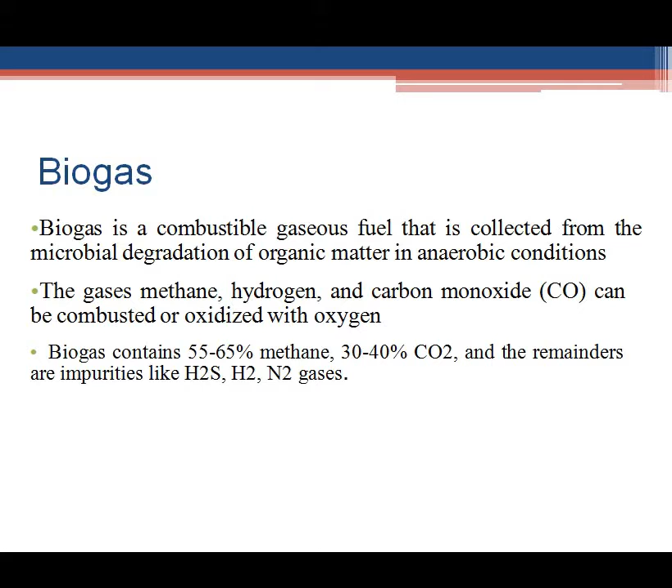So biogas mainly comprises 55 to 65% methane and 30 to 40% carbon dioxide, and the remaining impurities like H2S, that is hydrogen sulfide, hydrogen and nitrogen gases. Now moving on further, biogas is produced by digestion, pyrolysis or hydrogasification. Digestion is a biological process.

See, anaerobic digestion is nothing but any process which is taking place in the absence of oxygen. Aerobic is in the presence of oxygen. Anaerobic is in the absence of oxygen. So whenever a process takes place in the absence of oxygen, that is known as anaerobic respiration or anaerobic digestion.

So in the absence of oxygen and the presence of anaerobic microorganisms, this anaerobic digestion takes place in a container called a digester. In this digester, the organic matter undergoes fermentation and anaerobic bacteria extract oxygen by decomposing the biomass at low temperatures, in a temperature range of 35 to 70 degrees Celsius, and in the presence of moisture, this process takes place.

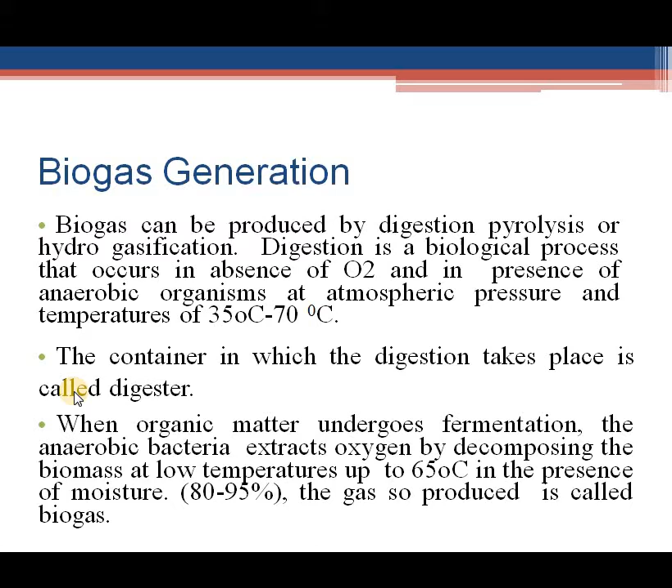So when this process takes place, there are certain stages. At the end of these stages, biogas or methane is produced. If you look further at biogas generation, there are four processes: hydrolysis, acidogenesis, acetogenesis and methanogenesis.

Okay. So there are different requirements of the environment present. Hydrolyzing and fermenting microorganisms are responsible for the initial attack on polymers and monomers, and these produce acetate and hydrogen and varying amounts of fatty acids.

So there are 4 stages of anaerobic fermentation to accomplish methane production: hydrolysis, acidogenesis, acetogenesis, and methanogenesis. In hydrolysis, the biomass normally comprises organic polymers such as carbohydrates, proteins or fats, which will be broken down into smaller molecules such as amino acids, fatty acids and simple sugars.

Hydrolysis is the first step of anaerobic fermentation, where fermentative bacteria hydrolyze complex organic matter into soluble molecules. The products of hydrolysis, including hydrogen and acetate, may be used by methanogens later in methanogenesis. The majority of molecules can be used, and this process is further broken down so they may produce methane. From here, the next process takes place.

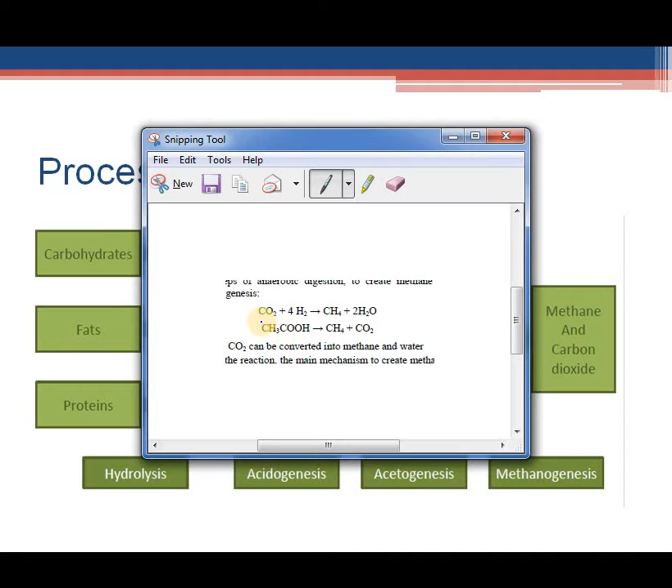During methanogenesis, the byproducts of hydrolysis, fatty acids, are used. Here, carbon dioxide and 4 hydrogen molecules combine and become methane. The main purpose of methanogenesis is to produce methane: carbon dioxide and hydrogen produce methane and 2 molecules of water.

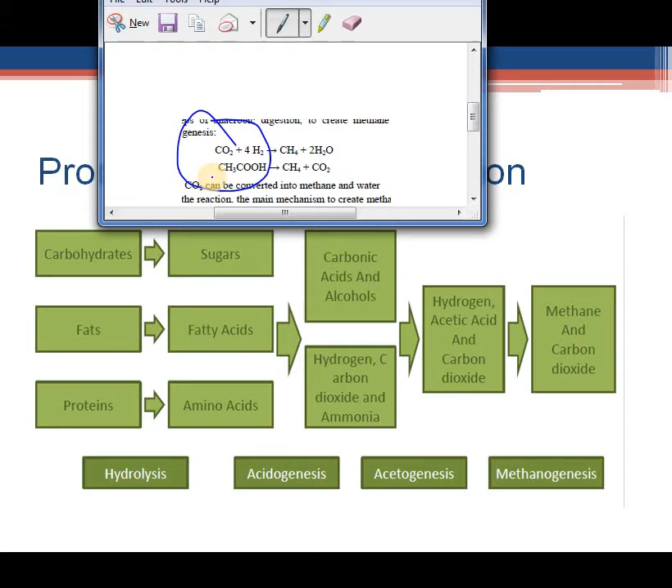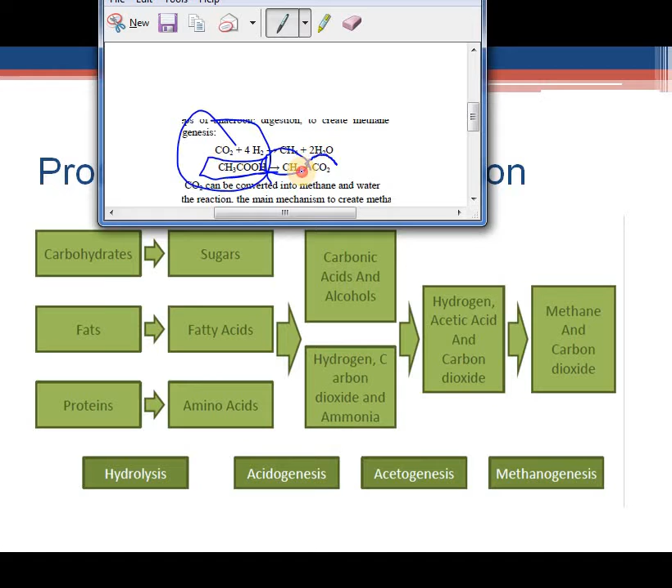And acetic acid breaks down, producing methane and carbon dioxide. These carbon dioxides can be converted into methane and water through the reactions we have just seen. So these are the different processes we undergo during the generation of biogas, the principal production of biogas.

So the composition of biogas: biogas is 20% lighter than air, and the temperature would vary from 650 degrees Celsius to 750 degrees Celsius. It is an odorless and colorless gas that burns in a clear blue flame, similar to that of LPG gas. The calorific value is 22 megajoules per 1 meter cube.

So what does its composition consist of? Methane, that is 50 to 75%, and carbon dioxide is 25 to 50%. Nitrogen comprises 0 to 10%, hydrogen is 0 to 1%, and some traces of hydrogen sulfide and some water vapor will be present. So the main product of your biogas is methane, which helps in burning.

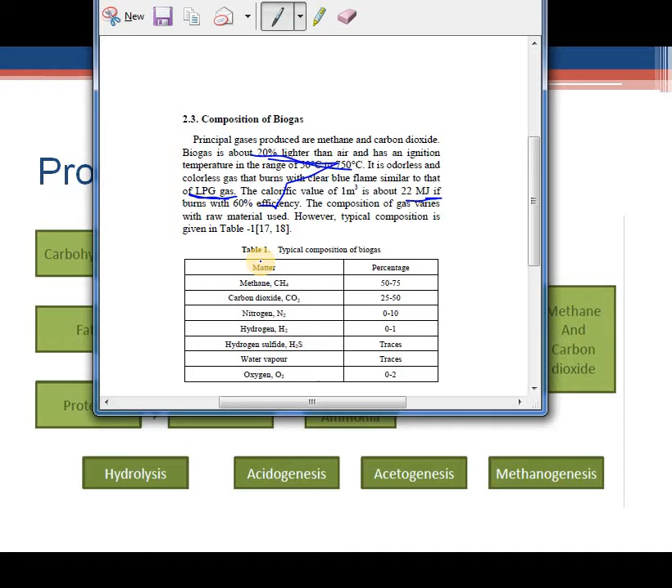So moving on further, we have site selection of a biogas plant. Whenever you are considering a site for the installation of a biogas plant, you have to keep in mind a few things. You need to facilitate easy construction work, without any problem, and the cost of construction should be minimized so that you can install a plant with the minimum cost.

And you must ensure that maintenance and operation of these plants is easy. The maintenance may comprise feeding of the plant, that means putting the organic matter into the plant, and use of the main gas valve, which must be in an appropriate place, and slurry must be made appropriately. You must also check for any leakages in this gas plant, and proper draining of water from the pipeline should be ensured. After the extraction of methane, proper drainage of whatever slurry is left should be provided.

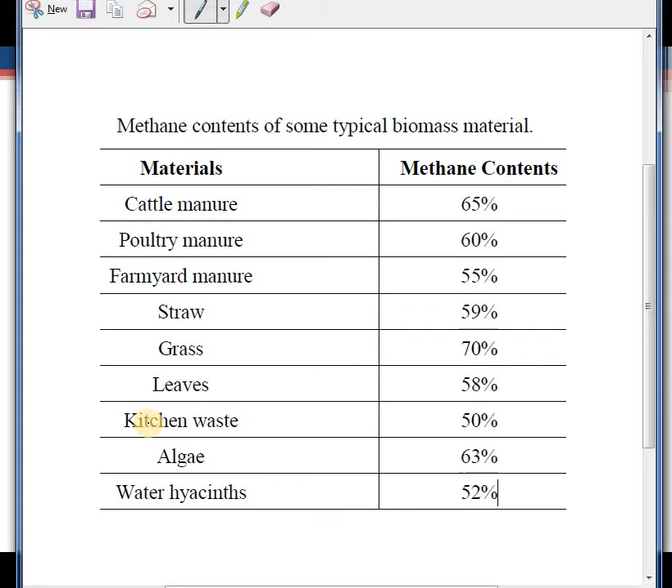52%. So the highest methane content is in grass, because the carbohydrate in grass is more compared to cattle or poultry manure. Poultry manure, cattle manure or farmyard manure will have more nitrogen content, and grass and straws will contain more carbon content.

Okay, moving on further, we have the classification of biogas plants. First, continuous and batch type. The continuous one is fed daily, and the batch type is fed as per the process. Then we have single stage process and double stage process. They are also classified as dome type and drum type, and there are different variations in drum type also.

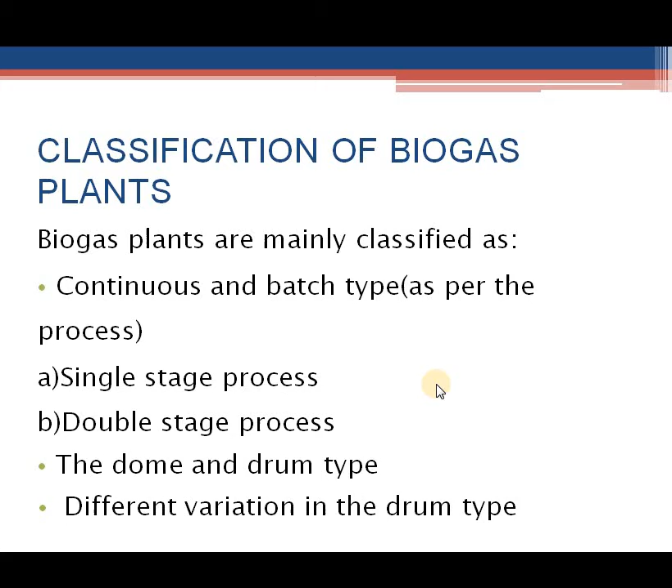So first, the continuous type. It has a single digester with raw material charged regularly, and the process goes on without interruption except for repair and cleaning. There are two types in continuous type. In this you will have a digester which is fed daily or continuously without any interruption. And double stage is the one which is being fed... we will see the diagrams.

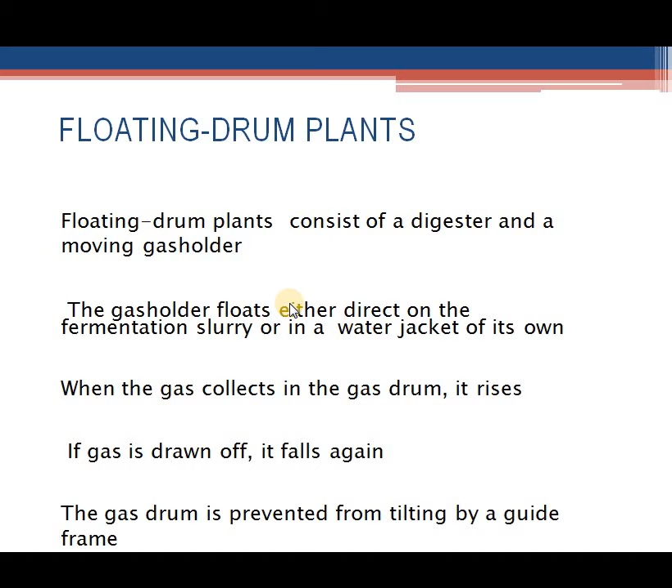The gas drum will float up and go up, and when the gas is utilized, it will again come down. The gas drum is prevented from tilting by a guide frame. Now, this is the main diagram of the floating drum type holder.

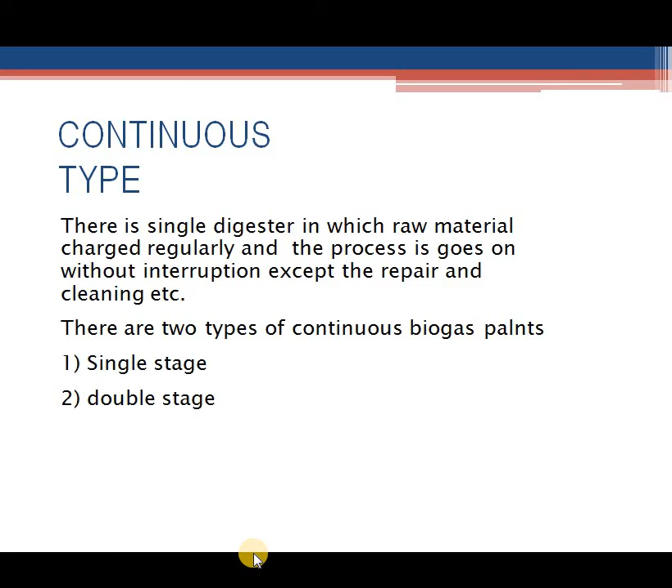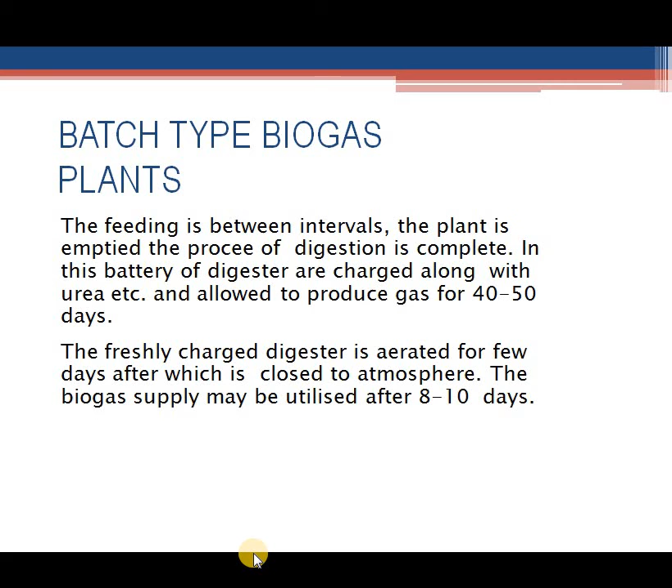So what are the different biogas plants we have seen? Fixed dome type, and we have seen continuous type and batch type. For continuous type you have single stage and double stage. In continuous type they will be fed at continuous intervals, and in batch type you will feed it, and once it is being utilized it will be emptied and again it will be fed.

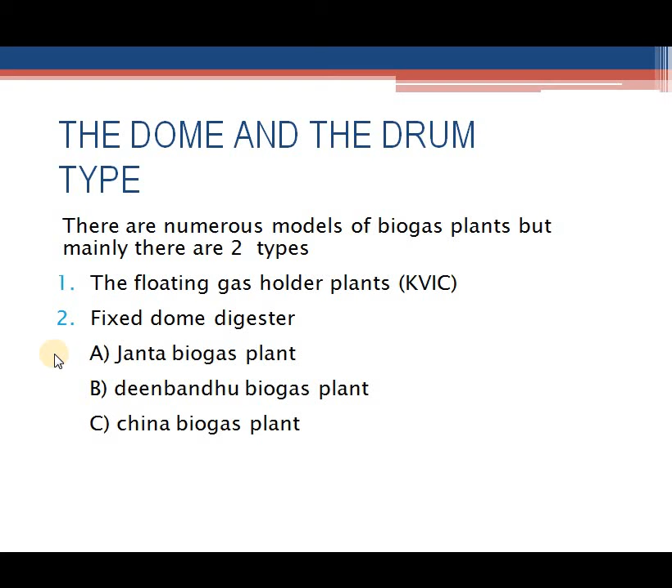Now the other type is the drum type - fixed dome type and floating drum type. In floating drum plant, the gas floater was floating. Once the gas was filled it will go up, once the gas is empty it will come down.

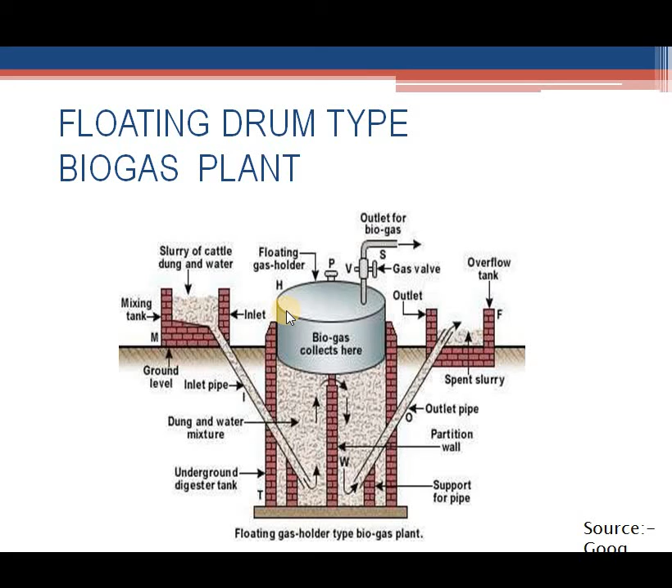That's the output for this. Then the fixed dome plant - in fixed dome plant, the pressure of the gas, once the pressure of the gas increases, it pushes the upper part of the digester. The pressure of the gas increases with the volume of gas stored, and it should not exceed 20 meter cube. When you have little gas in the holder, the pressure will decrease.

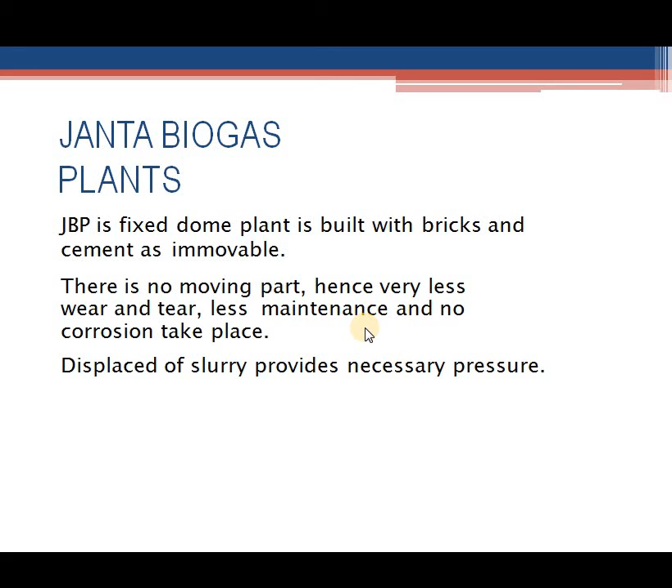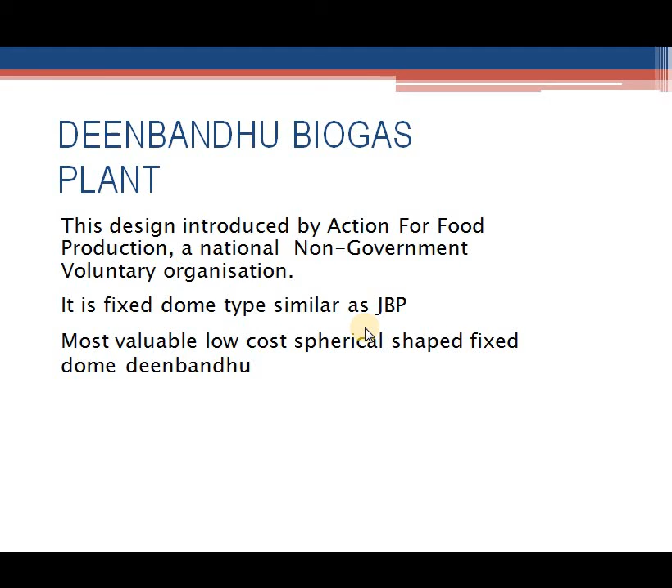Fixed dome types are classified into two. There are two plants constructed based on the principle of fixed dome type: the Janta biogas plant, wherein you have similar construction as that of the fixed dome type, and the Deenbandhu biogas plant, which was constructed by Action for Food Production, a national non-governmental voluntary organization. This is a fixed dome type, similar, most valuable, low cost, and spherical in shape - that is the Deenbandhu biogas plant.

Now moving on further, we will see the advantages and disadvantages of biogas plants. There are many advantages and disadvantages if we see. The cost of the equipment is first and foremost - it must be cost effective. The cost of equipment for making biogas is less and the equipment used is very simple. Biogas plants are cost effective and can be built and repaired with locally available materials, with low operating cost.

Further, they can be used for lighting, running of engines, farm machines, and cooking gas in kitchens. The technology of these biogas plants is cheaper and simpler, and it is ideal for small scale industries.

Now, organic feedstock used in the plants can be easily available at places. Biogas plants give efficiency as much as 60%. Waste products obtained from the digester are also of best quality - fertilizers and best yields, and they create employment locally. Also, the pollution is limiting.

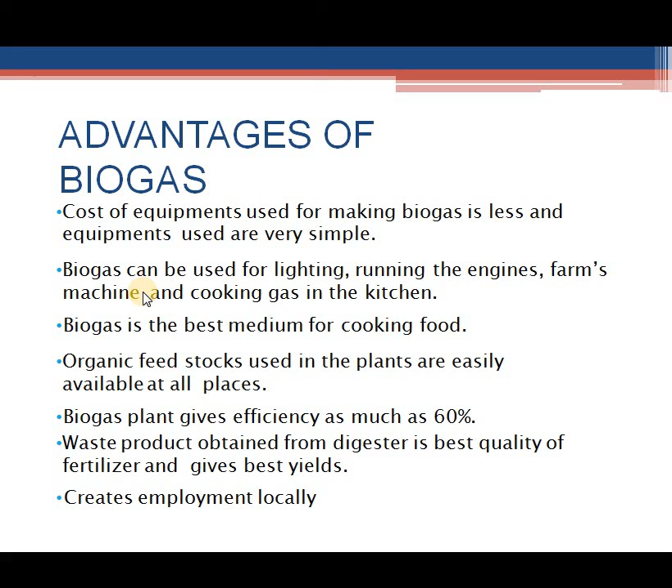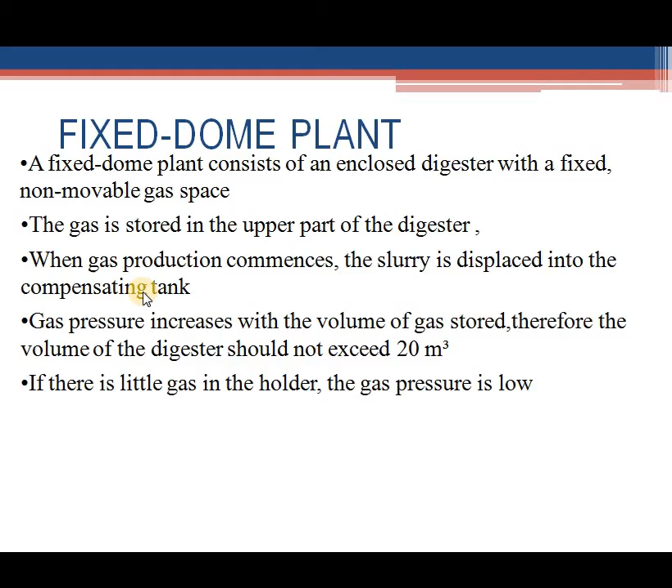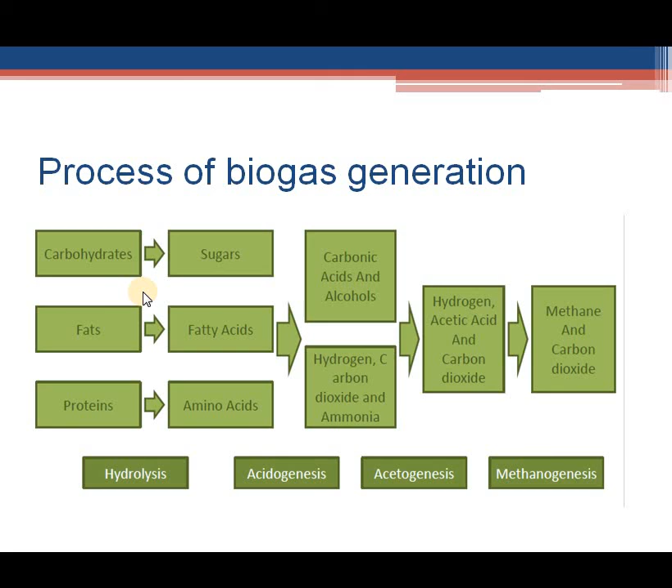So this is the end of biogas generation and the different types of biogas plants used. This biogas generation produces methane, so anaerobic digestion technology is used for production of biogas plants. It is simple and finds advantages in domestic and farming applications, but it can't be used for high-end industrial purposes where large amounts of generation take place.

It can only be utilized for small scale industries or in rural areas, and can substantially contribute to sustainable energy, particularly in areas with more agricultural or municipal waste. You can't install these plants in urban areas without agricultural or municipal organic waste. Apart from this, they are a good form of energy source, utilizing biomass and agricultural waste.

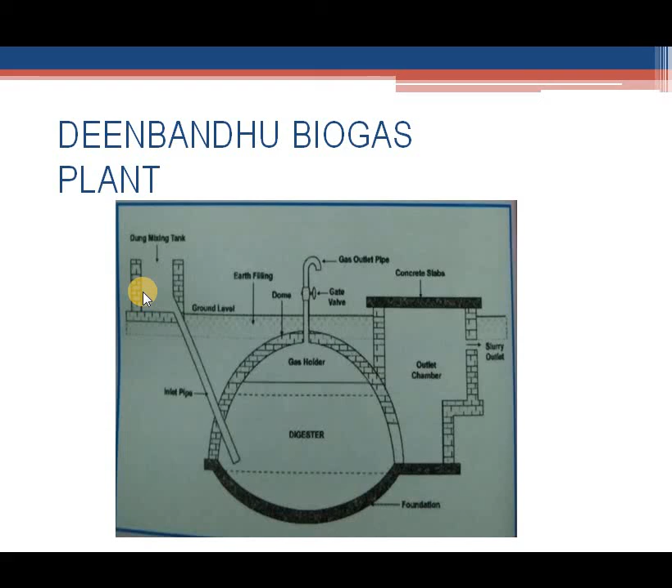So what we can say from this is that the review of fundamental biogas technology shows it will be utilized in rural areas, and is also good for farmers or people with low employment rates - they can install these biogas plants and utilize them.

The production of biogas is reducing the use of fuels from cutting wood, and fuels which create pollution. So pollution is being reduced with the help of this, and it is also reducing and preventing deforestation, while managing all the waste byproducts we get from this.

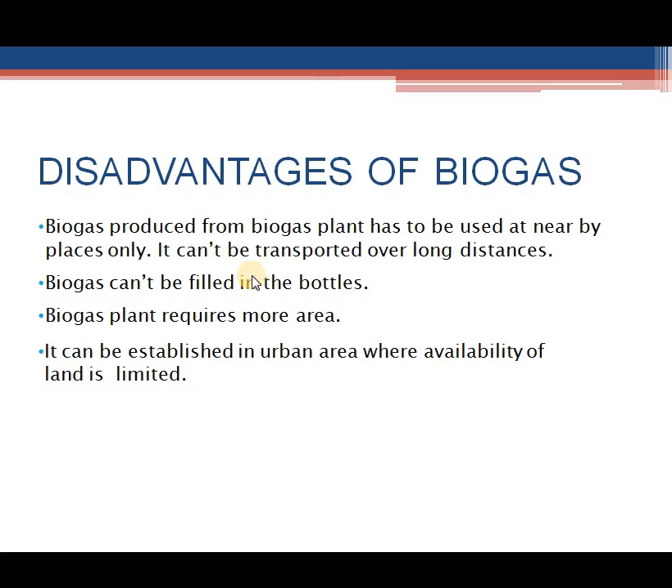So this was the part of your 5th unit, biogas generation or biogas production. So this is it for now.